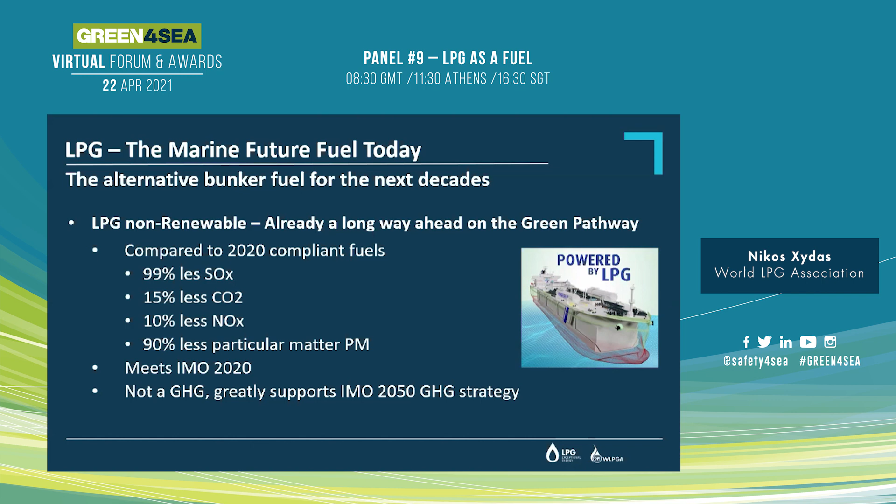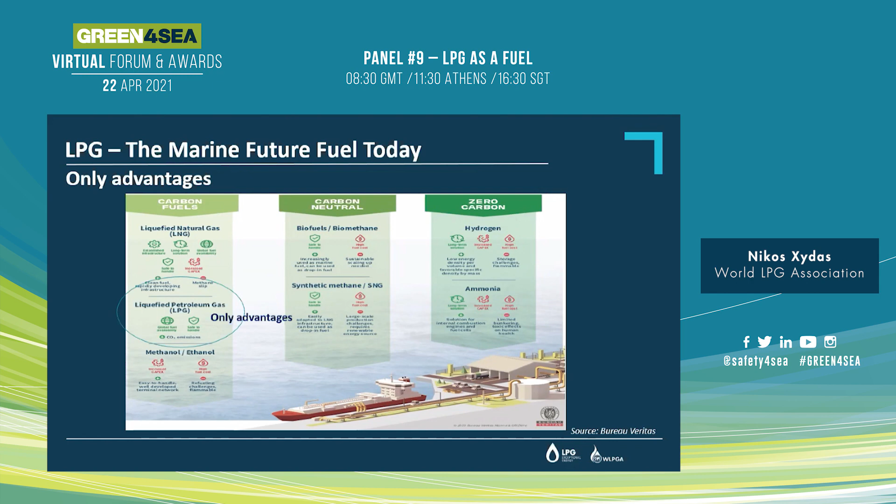One of the big advantages of LPG we like stressing is bunkering, its availability. The LPG industry is a very, very old industry - LPG has been around for 100 years, I think.

Available now everywhere, all over the world. Everybody can have access to LPG. In terms of marine, there are more than 1,000 existing storage facilities and terminals. We have more than 700 smaller vessels which can be used for ship-to-ship bunkering. And of course, every other terminal, every other storage facility that exists can be converted to be a bunkering point.

From this point of view, it is, I believe, the most advanced and most widespread fuel. There are already 4 LPG-powered vessels today sailing, and these are from B&W LPG. There are more than 71, we understand, vessels which are either in the pipeline or already built. Already built are the 4, and more of them are coming.

What MAN used to say when they launched this engine, and still say, is that in 2021, maybe 60% of the new builds of LPG carriers will be LPG powered. By 2027, they expect that 100% of these vessels will be LPG powered, and by 2028, maybe 30% of even the container ships, new ones, will be LPG powered.

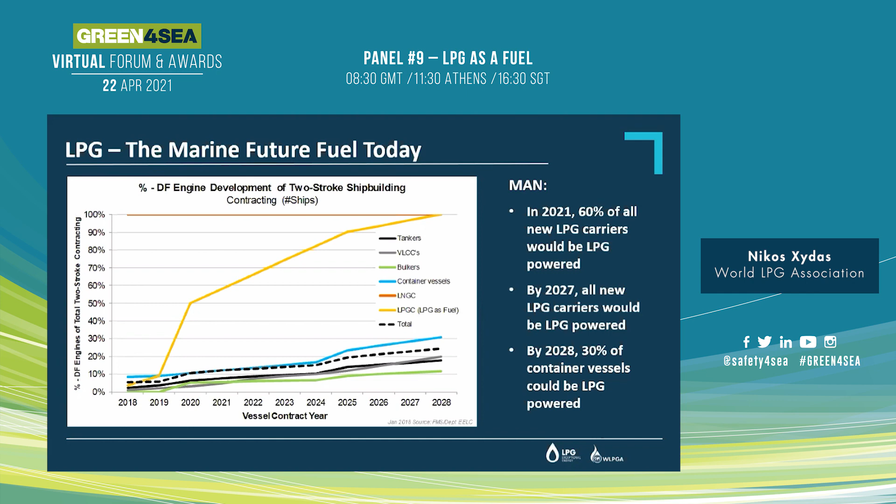However, this is not the only thing, the fossil LPG, the LPG that we know. A big advantage of somebody who uses LPG is that they can pass tomorrow to the bio-LPG, the renewable LPG, very easily. There is some product already in the market which is used for transport or heating today, and there will be much more coming in the future.

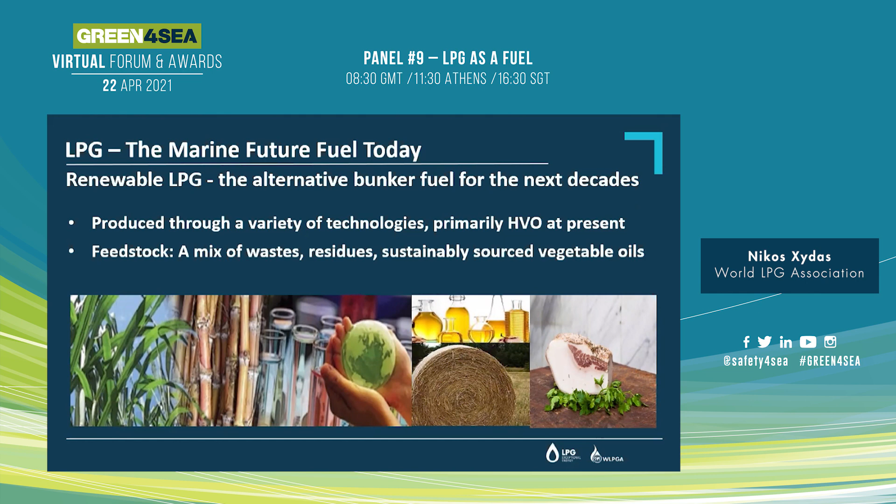The association is working very much on this aspect. Really a very good light in the future, also by passing from the LPG we know, the fossil LPG, to the bio-LPG, the renewable LPG, which comes from a mix of feedstocks, so waste, residues, vegetable oils, and much more. With this bio-LPG, we say that we will be able to reduce even further, by maybe 80%, the carbon emissions.

And even more than that, when we start considering, and we are already considering, mixes of other fuels, like, for example, renewable DME, which may be coming in the future.

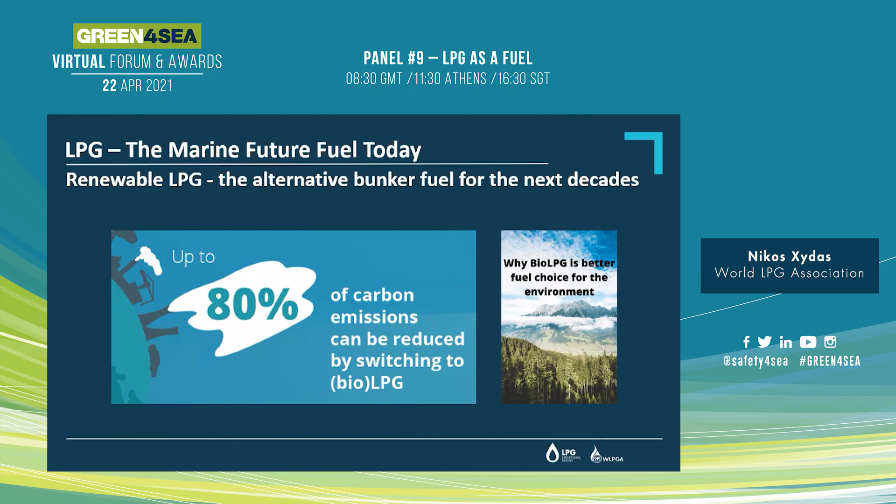So, in summary, LPG, we see only advantages. It is a proven fuel, as Apostolos was saying before. There is a tremendous experience everywhere on the use of LPG, its safety, its operation. It's a very good pathway to a net zero carbon future, either with carbon capture in the future, or also with passing to ammonia.

We know that LPG installations, LPG facilities, are with very little change compatible with ammonia. And the same, of course, with the ships. We'll be running LPG, can pass to ammonia tomorrow with very small modifications. And with the renewable LPG, it's really the great cherry on the cake.

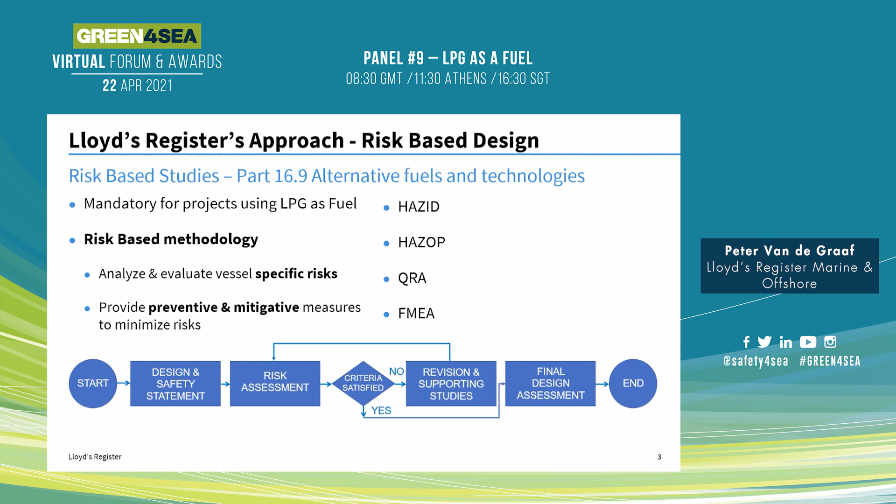One thing to be said is that it's very beneficial for the HAZID to have already an observer from the plan approval office available, who is not actively taking part in the HAZID, but who is listening and who can, at a later stage in the plan approval stage of the documents, better situate the decisions that have been made during the risk-based design.

The risk-based design is supported by a ShipRight document from LR, which stipulates the procedures to be followed. The risk acceptance criteria is based on the likelihood and the consequences of the events that can happen in any part of the system of LPG as a fuel.

In my opinion, the positive and honest approach of the HAZID to achieve a good risk-based design is crucial for the development of alternative fuels. All the SMEs and partners around the table should be convinced that they have used all their knowledge to come to a safe design. Failing of a HAZID could result in accidents.

This could jeopardize new technologies with alternative fuels to proceed in further materialization. So it's crucial that the HAZID is done in a very proper way to be able to provide a safe technology.

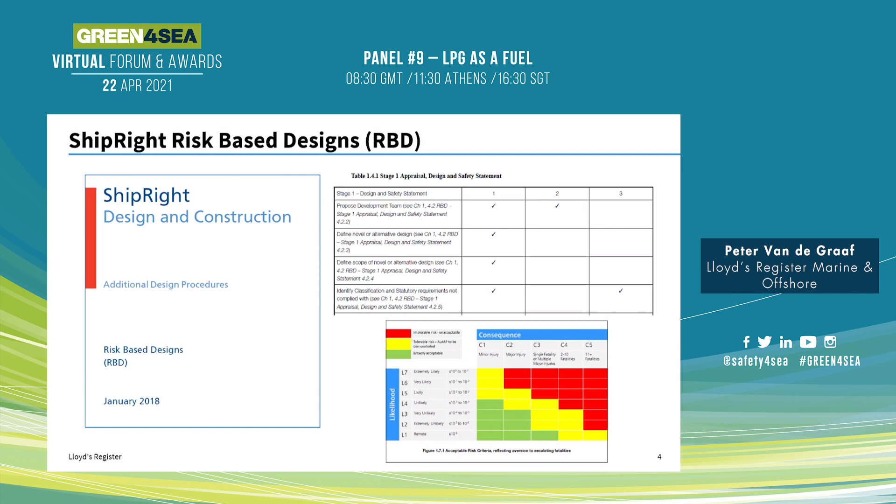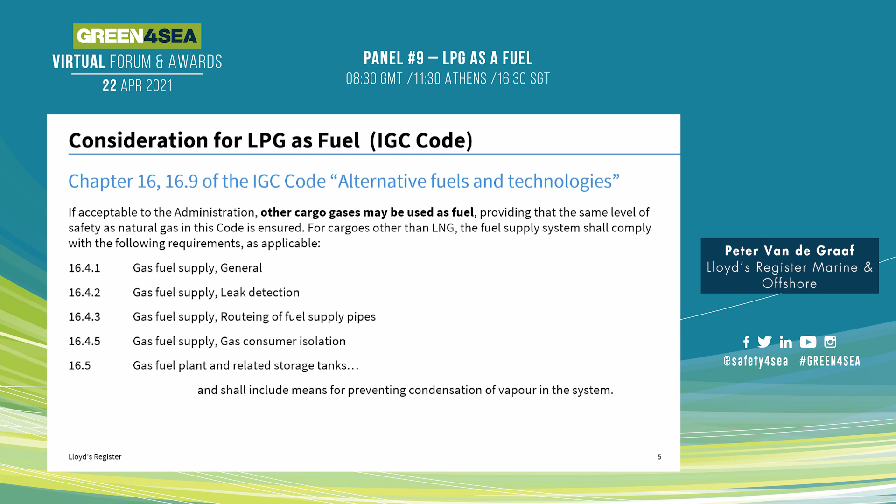The IGC Code is also referring to the alternative fuels technology, and there are some special requirements as indicated on this slide, which are looked at and considered during the HAZID.

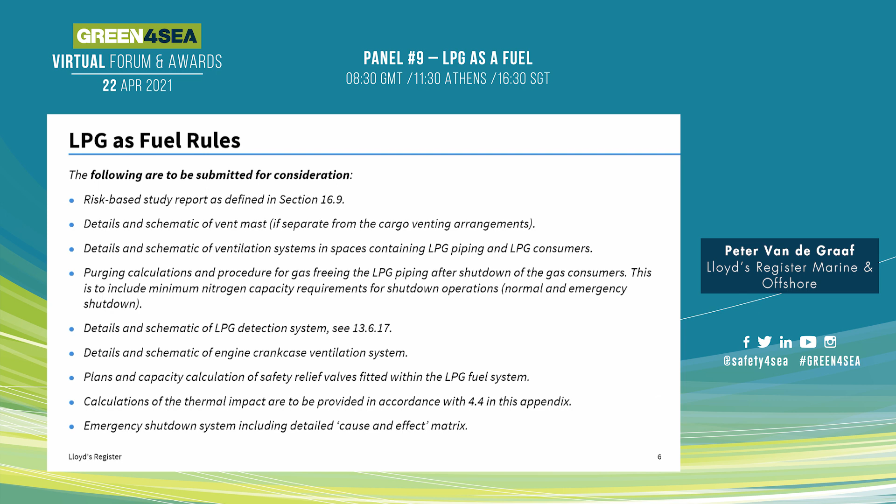As for the documentation required, on this slide you can see a list of documents that need to be provided to the HAZID team and later also to the plan approval office, apart from the traditional drawings of hull and machinery, to have LPG used as a fuel on the vessels.

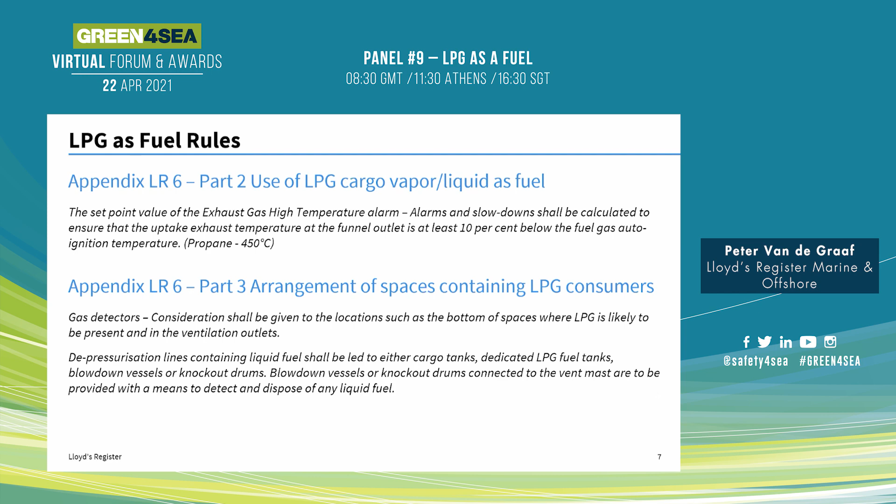On this slide, you see the special requirements for exhaust temperature, gas control, gas detector systems, and the depressurization of the liquid containing fuel lines, how they have to be dealt with, and which requirements are available for this part of the system.

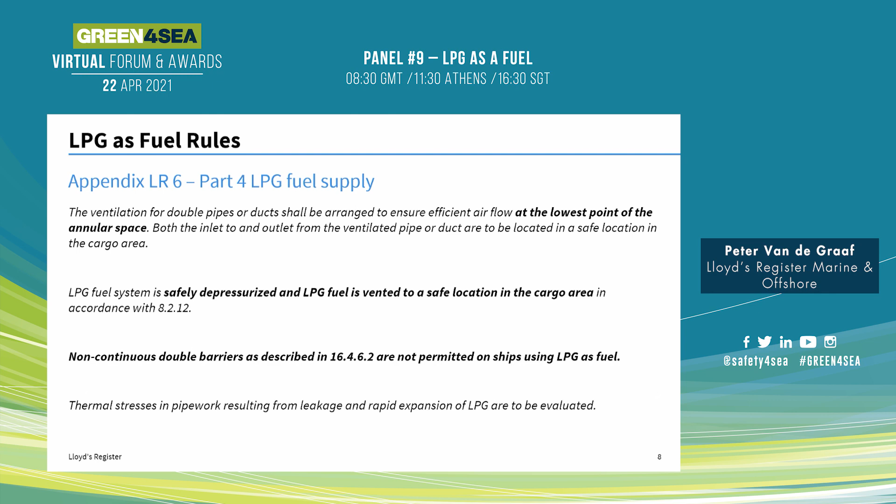There are also special requirements for the annular space of the double wall concept of the fuel lines in the engine room, such as where you lead the outlet of the annular space ventilation, etc. These things are all considered during the HAZID and also reviewed during the final plan approval.

Some items that will also be considered during the risk-based approaches, like possible spillages, the risk with fuel storage, and leak detection. But what needs to be said is that, especially on LPG carriers using LPG as a fuel, the system is, let's say, starting from the deck tank.

So it's a traditional gas carrier where the deck tanks are already available for a long time, so that experience is there. What is new is the fuel supply system and the treatment of the fuel towards the engine.

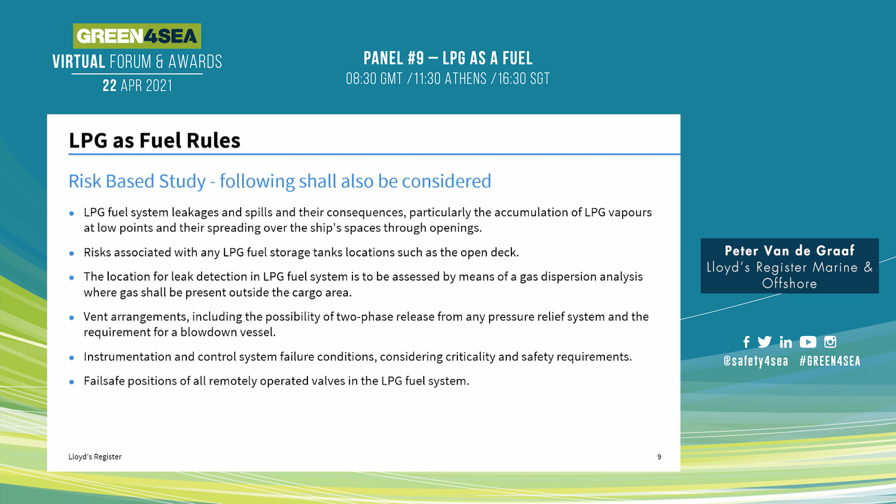When the vessels are complying with the requirements of the IGC code and the gas code, there is a class notation LFPF, GC standing for gas coming from cargo, and LP for liquid petroleum. What you can also have as a class notation is that LP is changed for PG, which stands for petroleum gas.

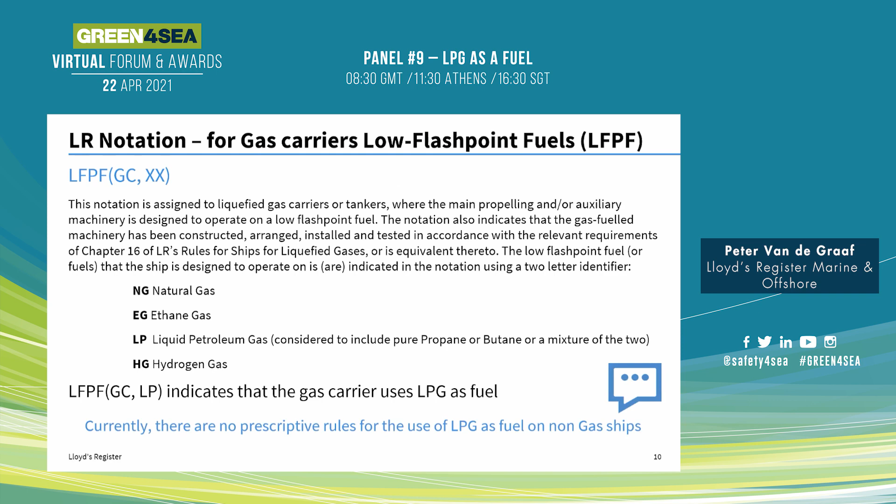Now, as for our track record from experience, I am a little bit fortunate having a company like Exmar in my area. We were already involved in the feasibility of LPG as a fuel in 2012, with a HAZID done in our UK office in September 2012.

Later Christophe will elaborate more on that. So thank you for your time, and I'm happy to have further discussions and answer questions later.

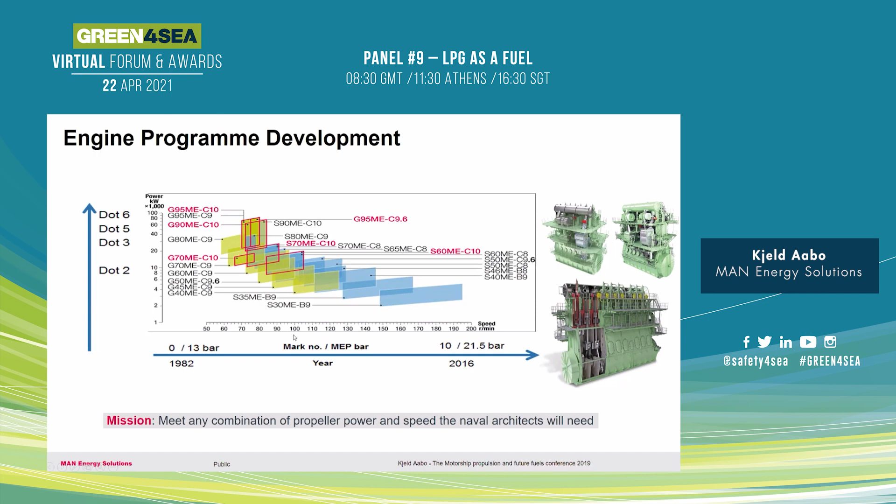We have also the smaller two-stroke engines here going down to about 3 megawatt. We have a lot of engines here in the engine development, and you see a lot of overlap of the different engines, and that's because we need to satisfy all these requests from the market, from the naval architects, from the ship owners, and so forth, so they will get an optimum engine for their application.

Today, our dual fuel portfolio consists of engines that can burn LNG, ethane, methanol, LPG, and in the near future also ammonia. We have, for the LNG, actually two working principles: we have the diesel principle and we have the Otto cycle.

But when it comes to all the other types of dual fuels like ethane, methanol, LPG, and ammonia, it's based on the diesel principle and not the Otto process. This Otto process was something we launched to the market, introduced basically for the LNG carriers, where when you use the diesel principle, you have to use a very costly high-pressure compressor, boosting the boil-off gas from the storage tanks up to 300 bar, and that gives a very high CAPEX, and therefore many customers choose the Otto cycle. So we have also that.

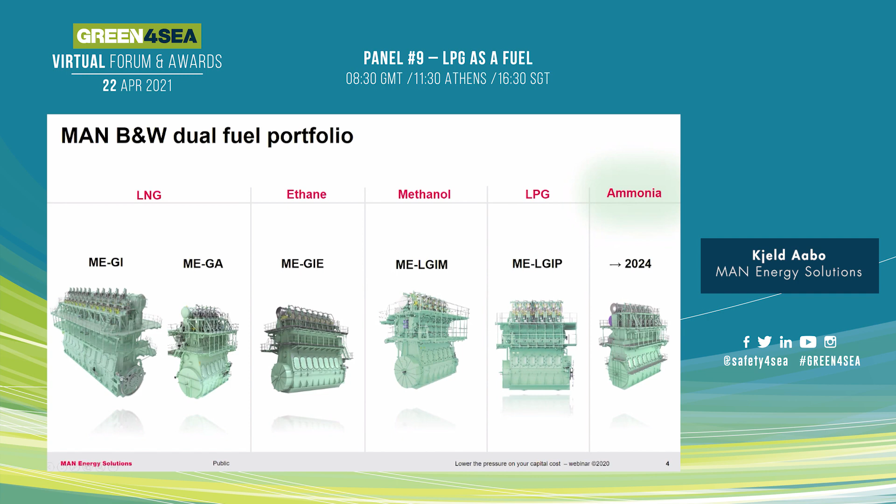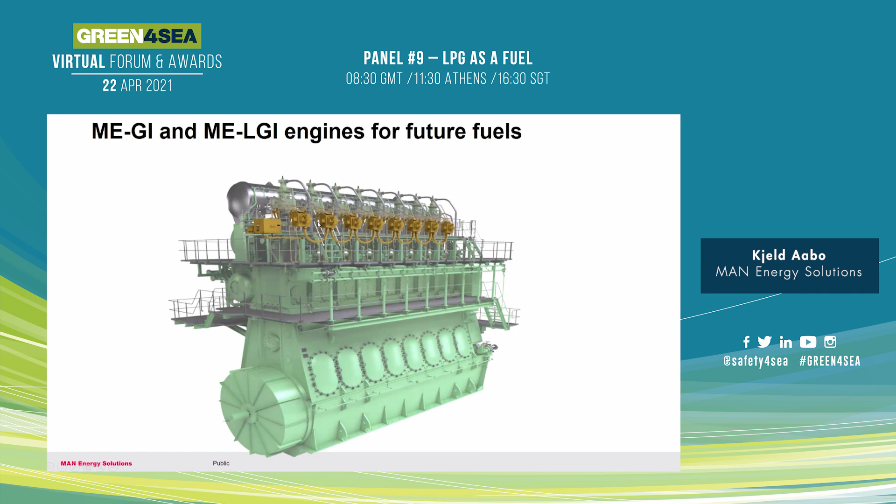But let's go back to the diesel principle. It's actually what we see here, like a normal engine. The dual fuel engine is a diesel engine where we have added on the injection system for this type of fuel, a dual fuel. So if you look here, you see this normal fuel oil burning engine, and now you see what's popping up here is actually the add-ons on the engine itself.

We can also see it here, closer view, in cross section. It's all around the top of each cylinder where you have a new cover. Because you have these dual fuel valves also introduced, you have a distribution block, and you have a double wall piping and so on.

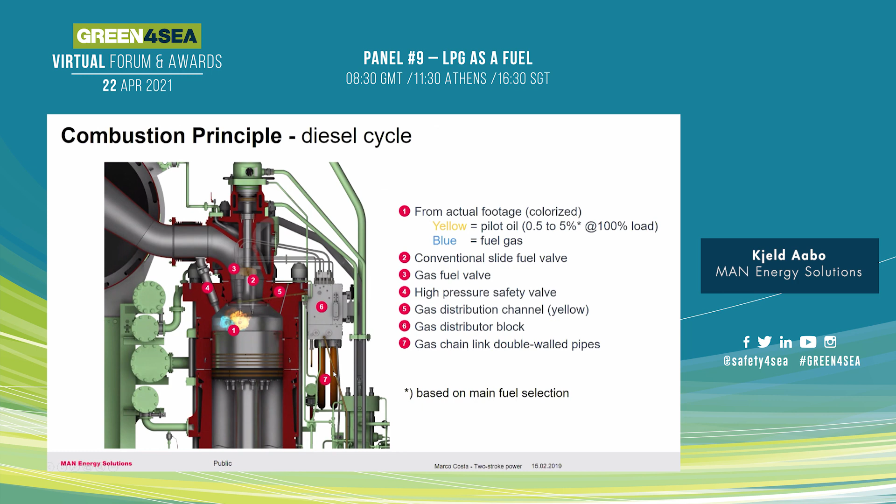So when we look at the valves, we have the fuel valve for the LPG, a fuel booster injection valve. So it's both a booster pump, you can say, and also a valve in itself to get the pressure into the cylinder. We have here the normal pilot oil valve that, of course, also can supply 100% fuel oil if that is what you want to operate on.

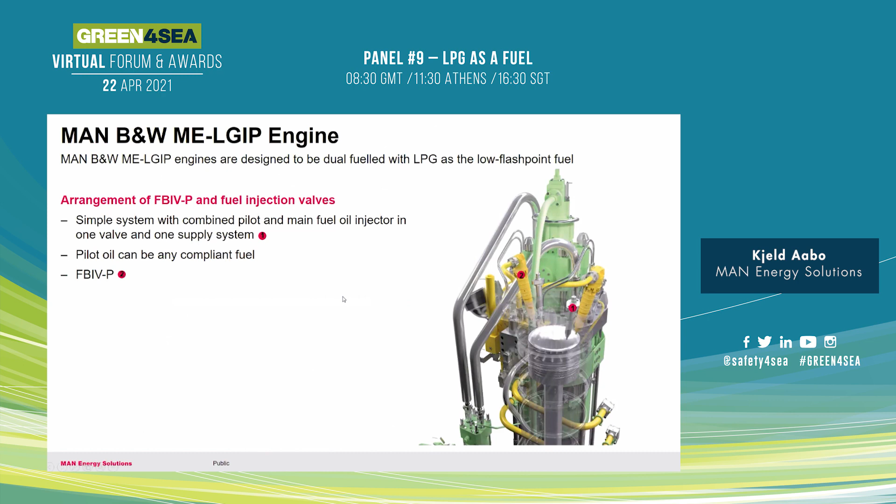This diesel engine and diesel principle is not very sensitive to the fuel oil itself and the LPG. Here in this case, we should have minimum 75% of propane and butane and maximum 25% of ethane, but that doesn't seem to be any problem in the market as such.

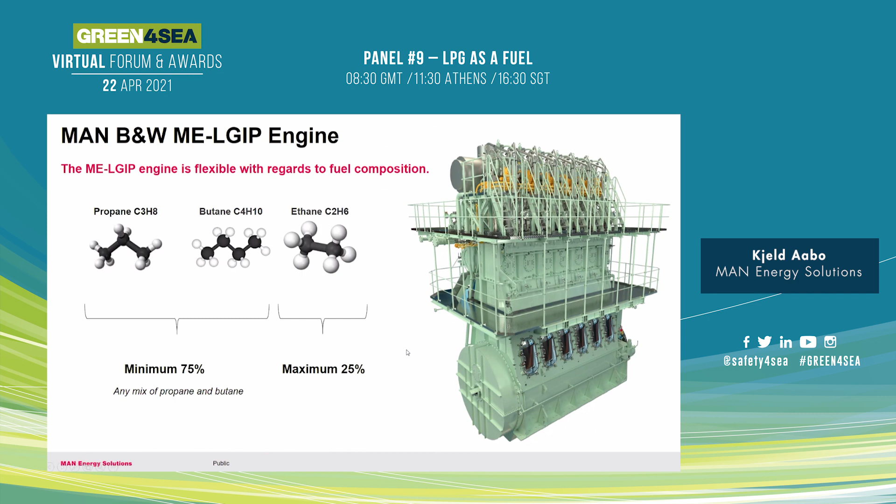So if we look at it overall about using LPG for propulsion, new building projects as well as retrofit references, we have actually ordered now and are retrofitting 15 ME-C engines to LGIP engines, which is the dual fuel propane engine, and that is for BW LPG.

We have already, Nikos has informed about the differences here on the emission side, I don't want to go into this. And what is important, of course, is also the attractive fuel price, traditionally lower or the same level as heavy fuel oil, which is quite an important part.

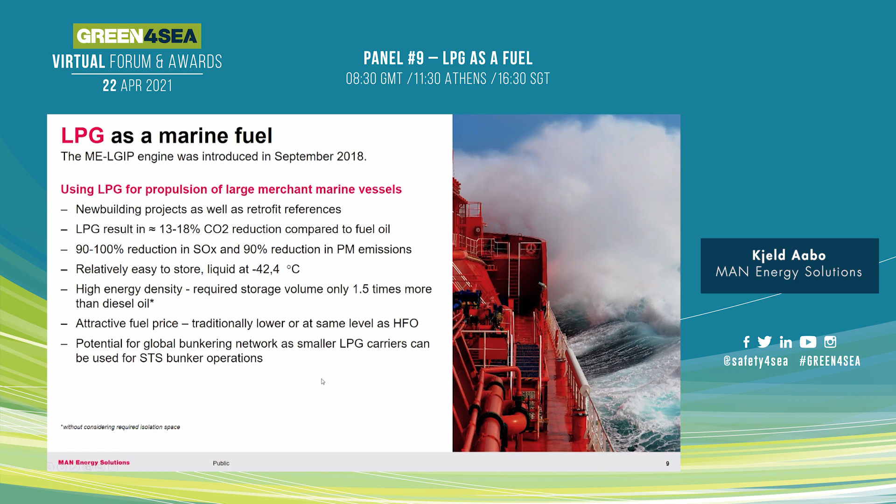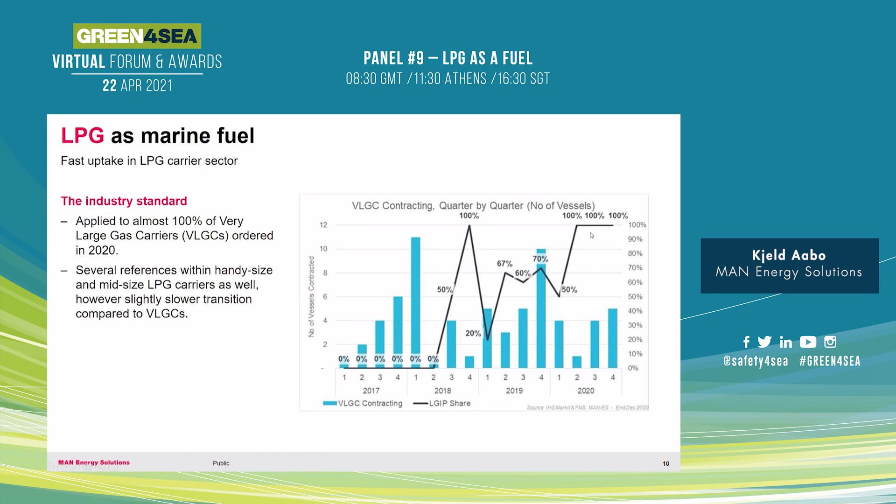And what we see is that it is actually going to be an industry standard, because today, almost 100% of very large gas carriers carrying LPG are actually ordering such engines.

If we look a little bit at the specifics for LPG, -42 is not that much compared to LNG, for instance. We have an injection pressure in the fuel gas supply system of 50 bar, but an injection to the combustion chamber of about 600 to 700 bar.

Actually quite close to what we expect will be the situation for the ammonia engine. But that we are going to test, and based on the testing, we will know more about where we land on that part. We are in full process.

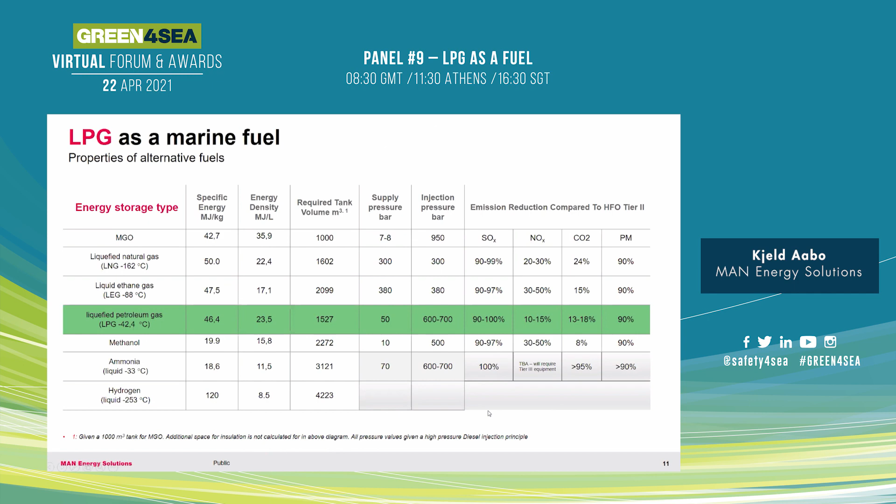Retrofit, I talked about retrofit, and the ME-C engine, the electronic, fully controlled fuel oil burning engine here, can actually be retrofitted to LNG, LEG, methanol, LPG, and in the future also for ammonia. If you have already a GI engine for methane, it can of course also be retrofitted to one of the others. Again, think about this. It's all add-on components to the existing engines, and a very small part of this engine is the dual fuel part actually.

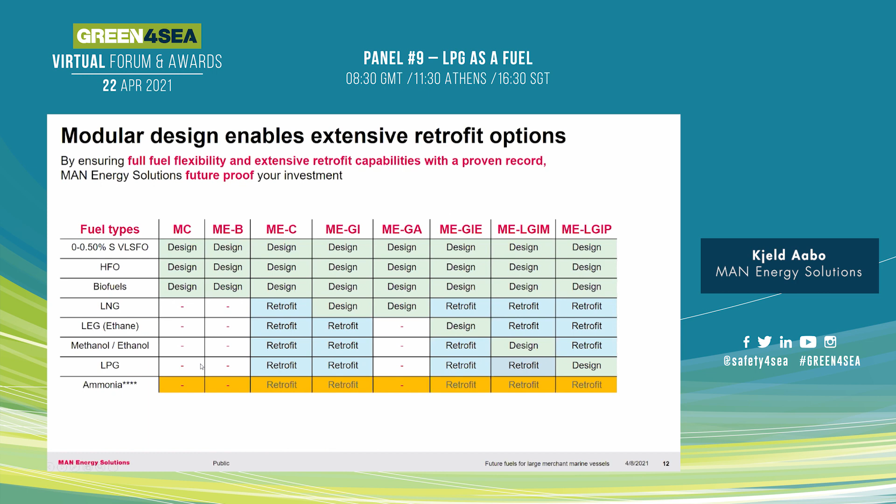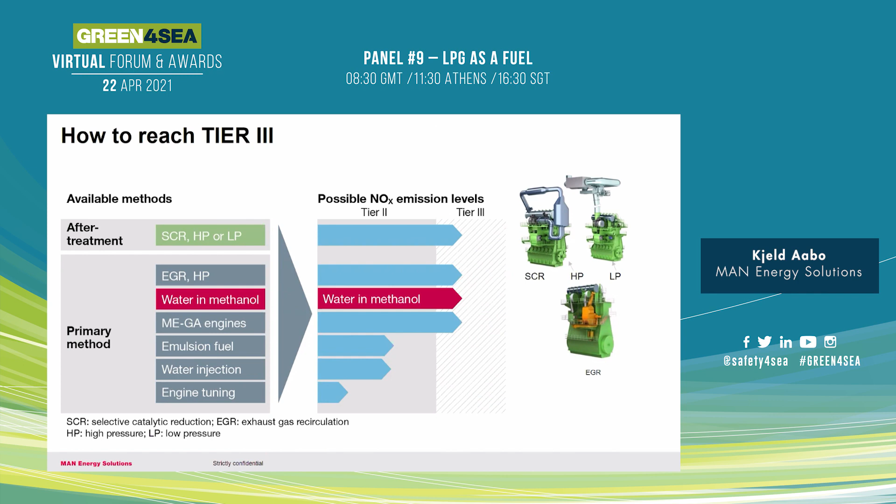When it comes to NOx, we still have to be compliant with Tier 3 and Tier 2, of course. And in Tier 3 case, we use SCR or EGR with the diesel principle. We will still have a high peak temperature in combustion chamber, and thereby also a high level of NOx. So that is taken care of in this way.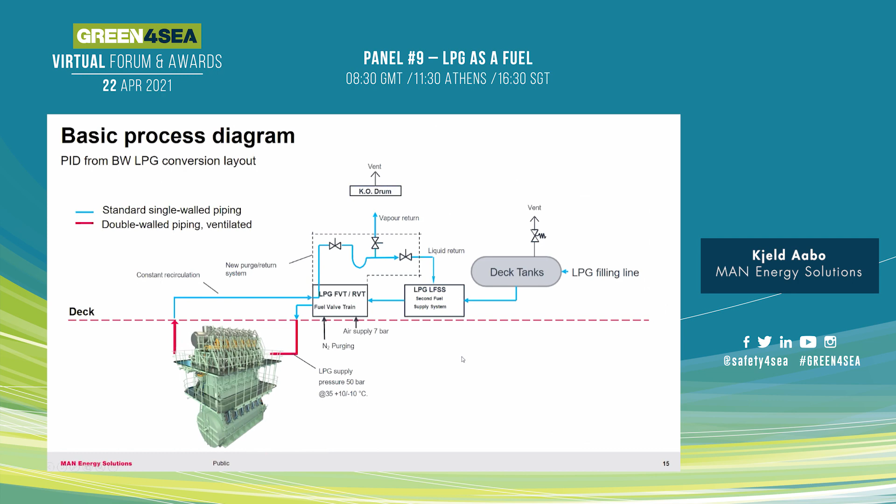We have also, and that was Peter mentioning about hazard investigations, we have been through a lot of hazard investigations, both on all the different fuels, and of course also in LPG. So safety is in spot, and also the reliability and availability of the system. This is my last slide. I just want to show you that we have sold totally 79 of these LPG engines, and it's just coming very, very strong.

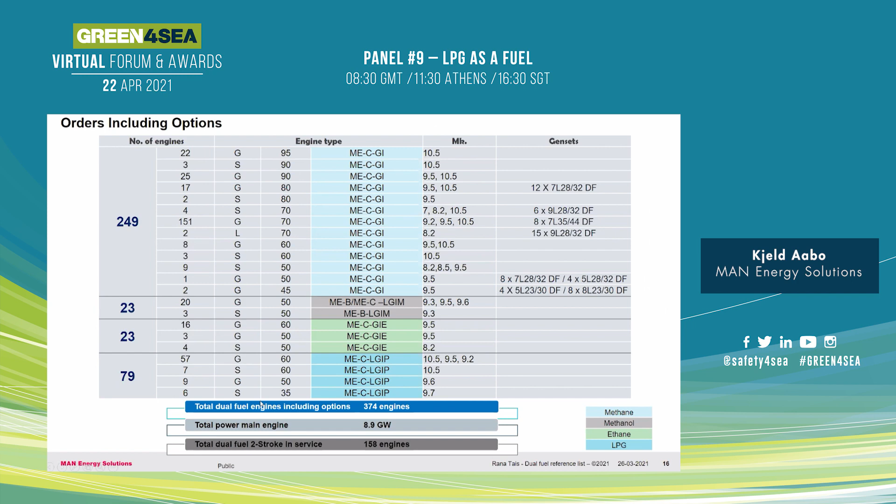Good day. My name is Kristof Coppé. I work for EXMAR, in the technical desk as a project manager for new building vessels. And I'm going to try to explain very quickly how EXMAR implemented everything which has been discussed now already about LPG as fuel on board of our gas carriers, some of our gas carriers.

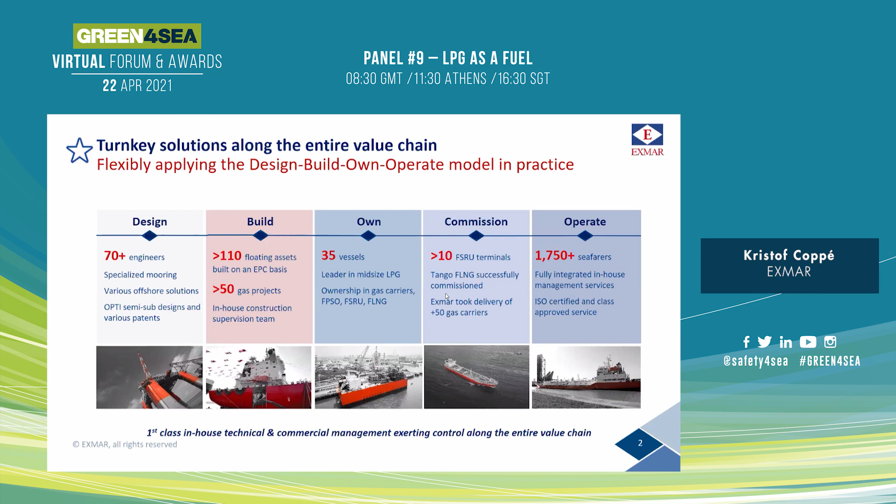So EXMAR, besides other activities, we are a ship owner. We have about 35 vessels, some fully pressurized vessels, but the major part are mid-size LPG and ammonia carriers. And apart from the mid-size vessels, we have two VLGCs under construction in Shanghai at Jiangnan shipyard. And these two VLGCs, that was the world's first order for a gas carrier with LPG as a fuel. Two large vessels will be delivered in Q3 of this year, and they will be sailing for Equinor.

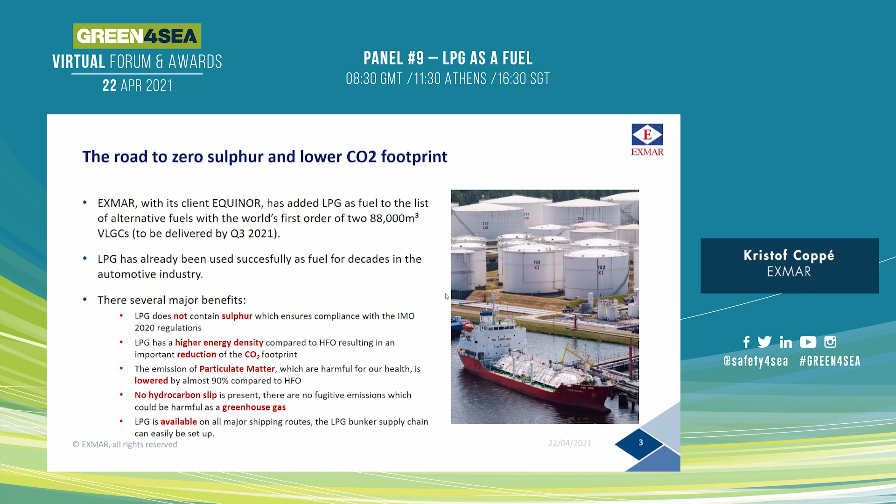LPG has been used already quite some decades in the automotive industry, and we bring it now to the ships because it has several benefits which have been discussed already, definitely when it comes to emissions. And as mentioned by Nikos as well, LPG is available among the major shipping routes around the world.

So I'm going to explain now very quickly how such an LPG fuel supply system on board of a ship works. So what you see here is the outline of a conventional gas carrier with a safe zone, which is basically the engine room, and a hazardous zone, which is the cargo deck and the cargo tank. So in the safe zone, you have your main engine, which is supplied by conventional fuel. And in the hazardous area, you have the cargo tanks, the deck tank most of the time, and reliquefaction units to keep the cargo at the required pressure.

And then we add several components. So we add an LPG bunker manifold to directly bunker the deck tanks. We add a fuel supply system with pumps and a heating, cooling mechanism to bring the LPG up to the required temperature and pressure. Then there is a fuel valve train, which has basically a double block and bleed function. So that is providing the barrier between the hazardous zone and the safe zone, because from the fuel valve train, we go via double walled piping to the main engine.

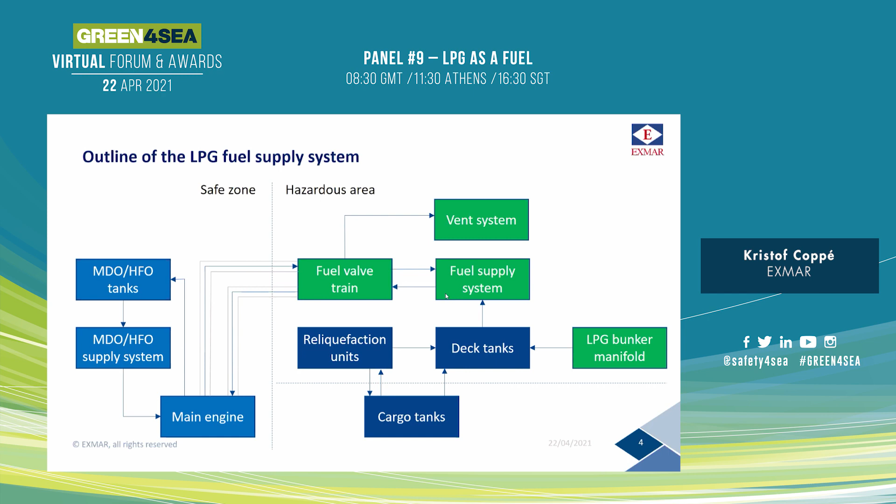And it has the same principle as you have with conventional fuel. You send more LPG to the main engine than you actually are consuming. So you also need a return line back to the fuel valve train. And then to end, you need a vent system. This was already mentioned by Peter. When the main engine is not consuming LPG, you need to depressurize the double-walled piping, so there is no LPG in the double-walled piping when the main engine is not consuming LPG. Keep it safe.

That fuel supply system consists of a high-pressure pump and a low-pressure pump. The pumps which were selected for that are side channel pumps. They're VFD-driven. A side channel pump is a little bit a hybrid between a positive displacement pump and a centrifugal pump. And the reason that we selected these pumps is that they can give a high pressure at a relatively low flow, and they can cope with the different LPG characteristics.

Just as mentioned by Kjeld, you can have propane, you can have butane, and there can also be a percentage of ethane inside of the LPG. As mentioned, the double-walled piping is purged, is vented when there is no LPG consumption. For that, a nitrogen booster system is installed to purge the LPG out of that double-walled pipe. But we don't purge it to the air.

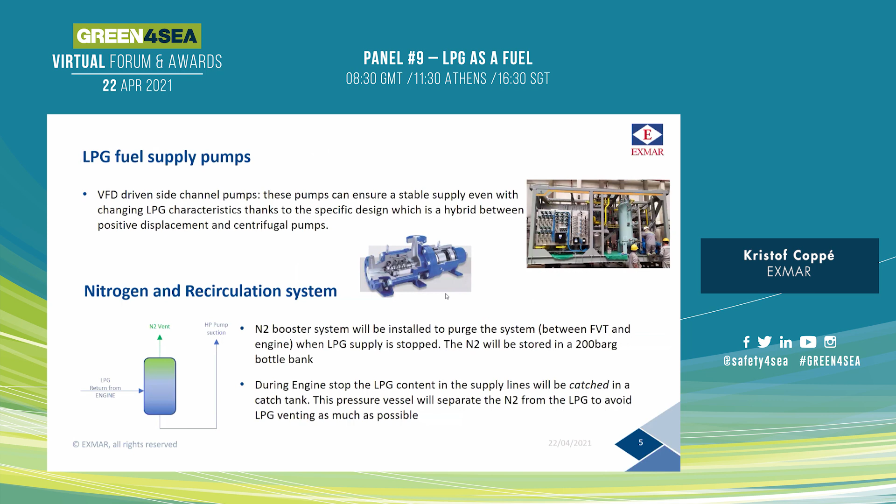No, we catch it. And for that reason, a catch tank system is developed and will be installed on the ship. And the basic function of that is to catch the LPG mixture together with nitrogen, which is purged from the double-walled piping. The nitrogen is vented and the LPG is used again the next time that the engine is started.

I mentioned already we have 2 vessels under construction at Jiangnan. The vessels will be delivered soon, but the main engine has already been tested. It's built by MAN's licensee CMD in Shanghai. Shop test took place end of last year. So we checked everything which we should check. The engine ran smoothly on LPG.

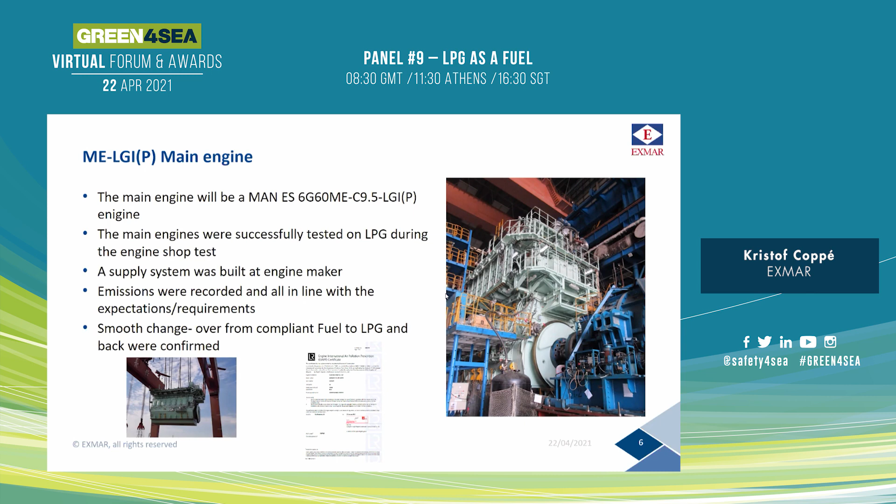There was a smooth transition as well from LPG to compliant fuel and vice versa. And also the emissions were recorded and they were all in line with the expectations. So the engine ran perfectly. There were no issues during the shop test. As mentioned already, LPG is a dangerous product. It's an extremely flammable gas. So there are several safety considerations which should be taken into account.

So first, as I mentioned already, the whole fuel supply system is installed in the gas dangerous zone, the gas hazardous zone, the cargo deck. The booster pump, the LPG fuel supply unit, the length of that 50-bar pipeline is limited as much as possible. And from the fuel valve train to the engine room, the whole piping system is double-walled. So what does that mean?

You have an inner pipe where the LPG is flowing in one direction, and in the annular space of an outer pipe, there you have a constant airflow, 30 air changes per hour, with a gas detector. So if there is a leakage from the inner pipe to the outer pipe, it is immediately detected and the LPG fuel supply is stopped. The engine keeps running, shifts automatically over to compliant fuel. In the unlikely event that there should be any gas in the engine room, there are also gas detectors installed there to detect flammable gases in the engine room.

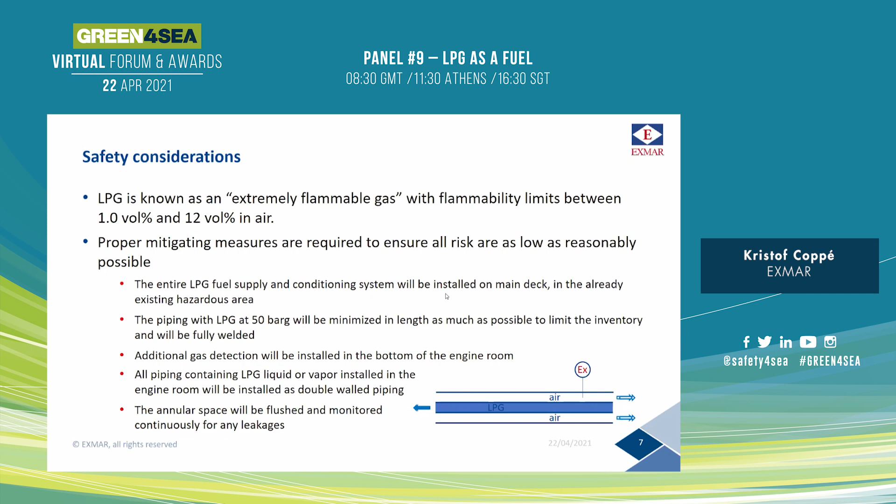As I mentioned, when there should be an issue with the LPG fuel supply system or there is an emergency stop, the engine automatically shifts over to compliant fuel. So you don't need human interaction there. It goes all in a very safe and sound way. The system of the main engine has been tested in the shop test, and that all went well. And the whole design of the system was built as per the rules from the Classification Society, from the new LPG as fuel rules from Lloyd's.

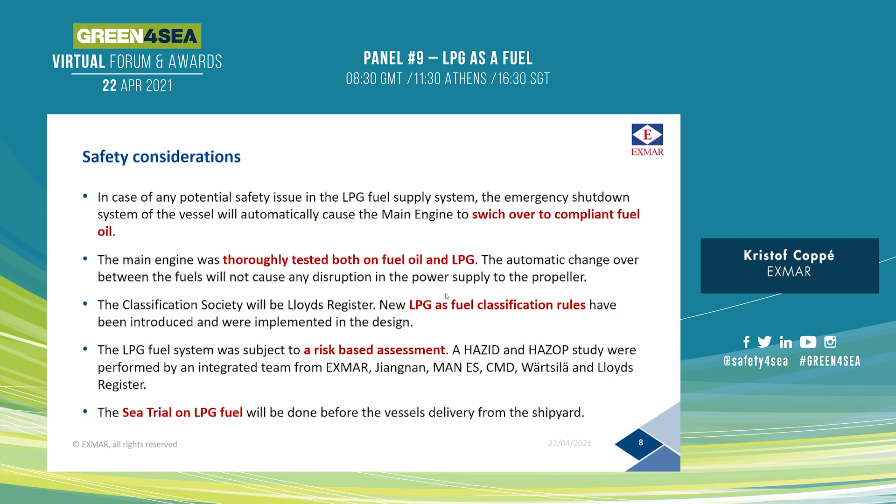As mentioned by Peter, it was a risk-based assessment. So we did a HAZID and a HAZOP with all the involved parties when the design was ready, and we did a safety study of the whole concept to verify if everything that was designed is safe and can be built and operated in a safe way. And there will be a separate sea trial conducted on LPG before the delivery of the vessel.

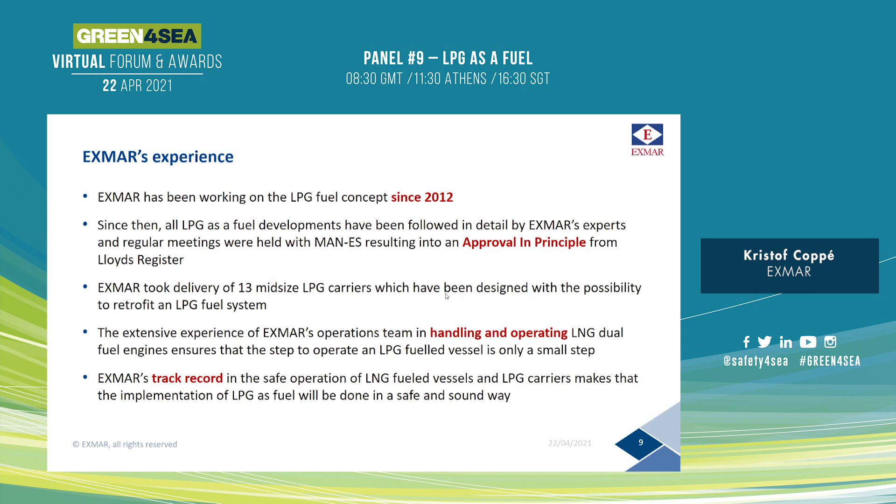As mentioned already, we started with this concept in 2012, where we obtained an approval in principle together with Lloyd's, also together with MAN. But it took till 2018 before it really materialized, and we ordered together with Equinor these 2 first LPG fueled vessels. But in the meanwhile, we have 13 mid-sized gas carriers which can be converted to LPG as fuel. We have quite some experience with handling LNG dual fuel vessels. We have a lot of track record with LPG vessels and LNG vessels. So we believe that we can operate these vessels in a really safe and sound way.

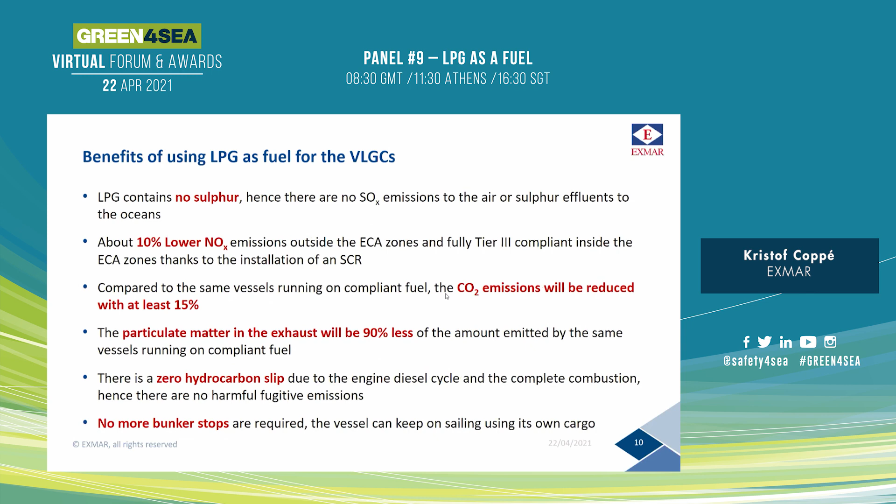And then to finalize, I summarize the benefits again for LPG as a fuel. There is no sulfur in the LPG, so there is no SOx emission. There's about 10% less NOx emission. We have 15% less CO2 emission. Particulate matter is reduced by 90%. There is no hydrocarbon slip because we use the diesel principle in the engine. And you actually don't require bunker stops anymore because you can use your cargo as fuel. So that brings me to the end of the presentation.